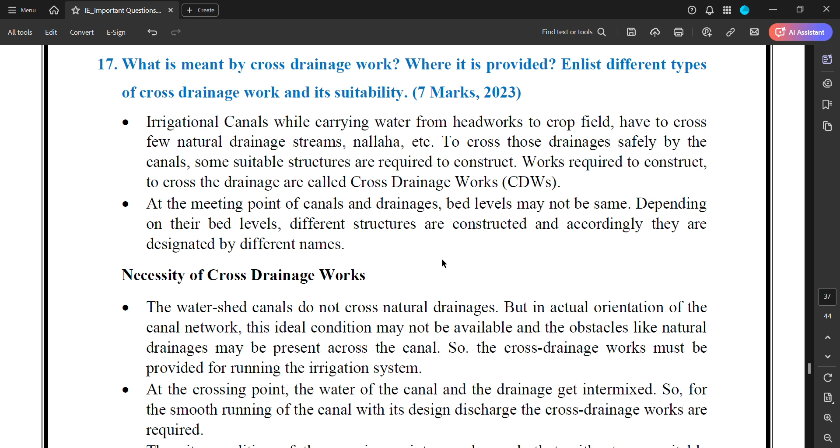At the meeting point of the canal and drainage, bed levels may not be the same. Depending on their bed levels, different structures are constructed and accordingly they are designated by different names. First is the necessity of cross drainage works. Watershed canals do not cross drainages, but in the actual orientation of the canal network, the ideal condition may not be available and obstacles like natural drainage may be present across the canal. So the cross drainage work must be provided for running the irrigation system.

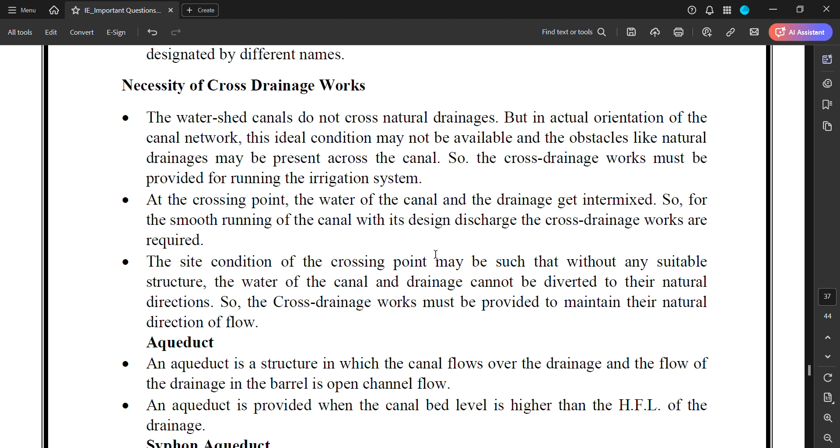At the crossing points, the water of the canal and the drainage get intermixed. So for the smooth running of the canal with the design discharge, the cross drainage works are required. The site conditions of the crossing points may be such that without any suitable structure, the water of the canal and drainage cannot be diverted to their natural direction. So the cross drainage works must be provided to maintain their natural direction of flow.

First is the aqueduct. An aqueduct is a structure in which the canal flows over the drainage.

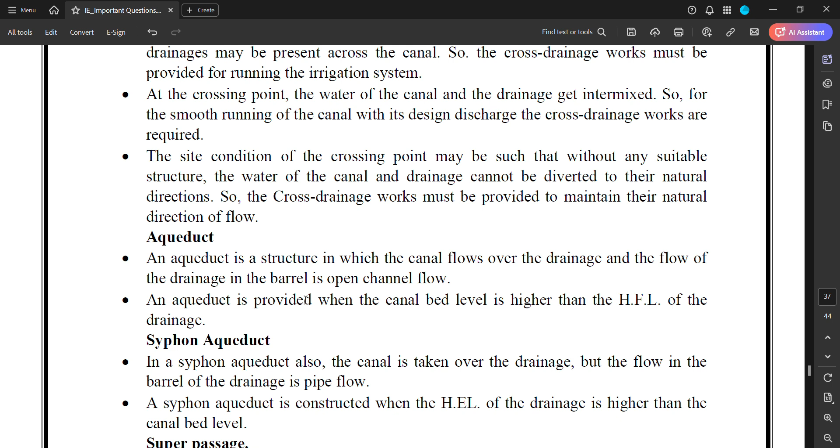Second is the siphon aqueduct. In a siphon aqueduct also the canal is taken over the drainage, but the flow in the barrel is a pipe flow.

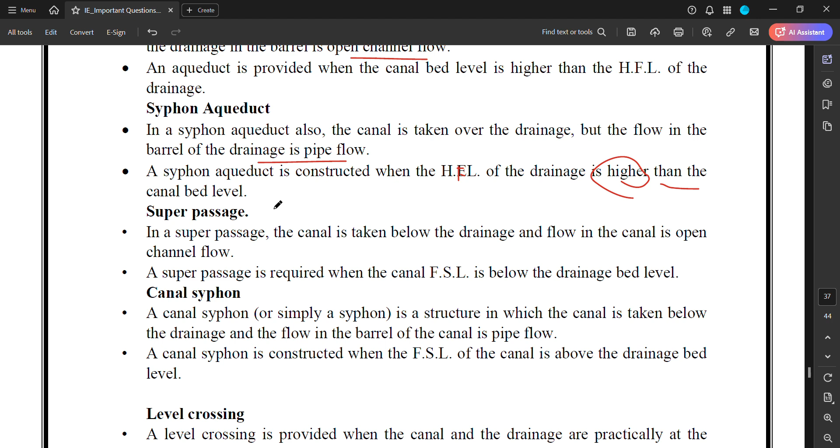A siphon aqueduct is constructed when the high flood level of the drainage is higher than the canal bed level.

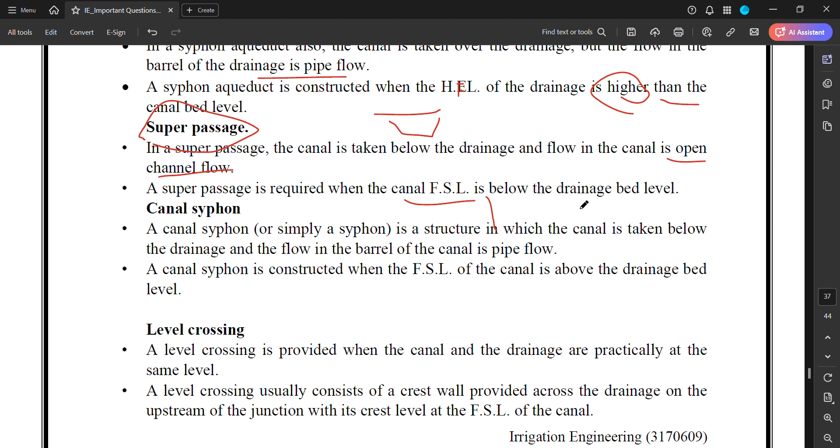Next is the super passage. In a super passage, the canal is taken below the drainage and the flow in the canal is open channel flow. When the flow in the canal is open channel flow, and the drainage is above and the canal is below, in these conditions we provide a structure called a super passage. A super passage is required when the canal full supply level is below the drainage bed level.

Canal siphon. A canal siphon, or simply a siphon, is a structure in which the canal is taken below the drainage and the flow in the barrel of the canal is a pipe flow. When there is a pipe flow, we can provide a canal siphon. A canal siphon is constructed where the full supply level of the canal is above the drainage bed level.

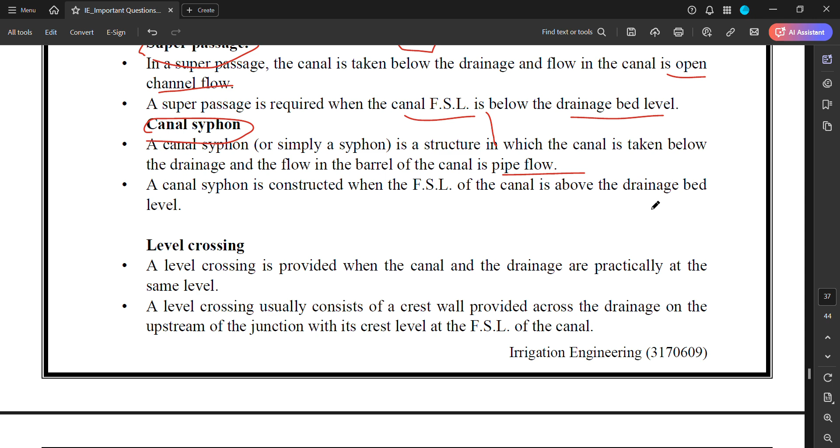Next is the level crossing. A level crossing is provided when the canal and the drainage are practically at the same level. A level crossing usually consists of a crest wall provided across the drainage upstream of the junction, with a crest level at the full supply level of the canal.

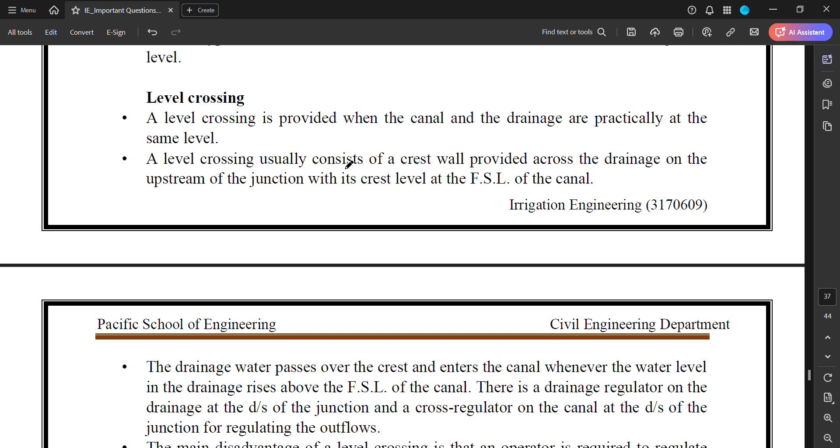The drainage water passes over the crest and enters the canal whenever the water level in the drainage rises above the full supply level of the canal. There is a drainage regulator on the drainage at the downstream side of the junction and a cross regulator on the canal at the downstream side of the junction for regulating the outflows. The main disadvantage of the level crossing is that an operator is required to regulate the discharge.

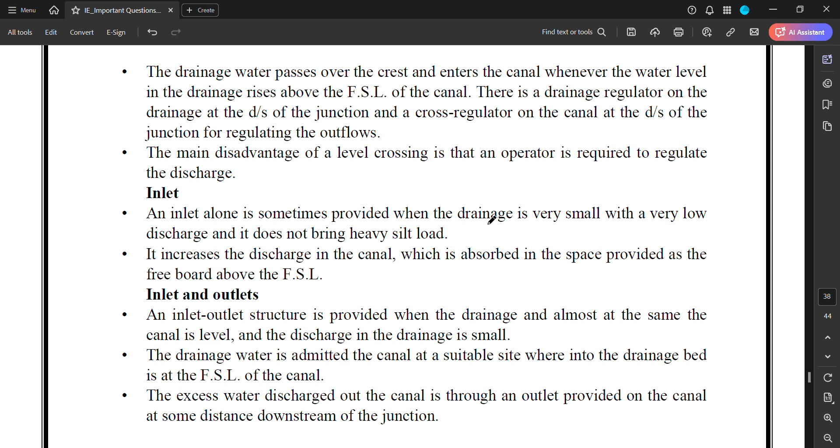Inlet. An inlet alone is sometimes provided when the drainage is very small. When the drain, river or any channel is very small, with a very low discharge, and it does not bring heavy silt, then we can provide an inlet. It increases the discharge in the canal, which is absorbed in the space provided as freeboard above the full supply level.

Last is the inlet and outlet. An inlet and outlet structure is provided when the drainage and the canal are almost at the same level, and the discharge in the drainage is small. The drainage water is admitted into the canal at a suitable site where the drainage bed is at the full supply level of the canal. The excess water is discharged out of the canal through the outlets provided on the canal at some distance downstream of the junction.

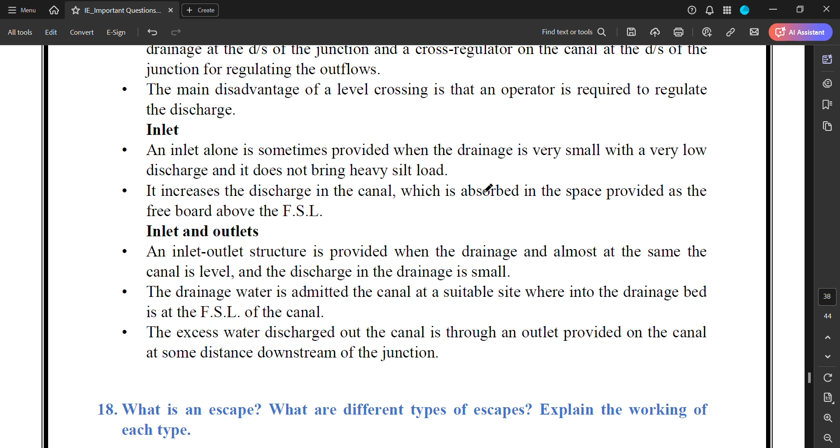So inlet and outlet, inlets, level crossing, super passage, canal siphon, siphon aqueduct and aqueducts. These are the cross drainage structures which we provide in cross drainage works.